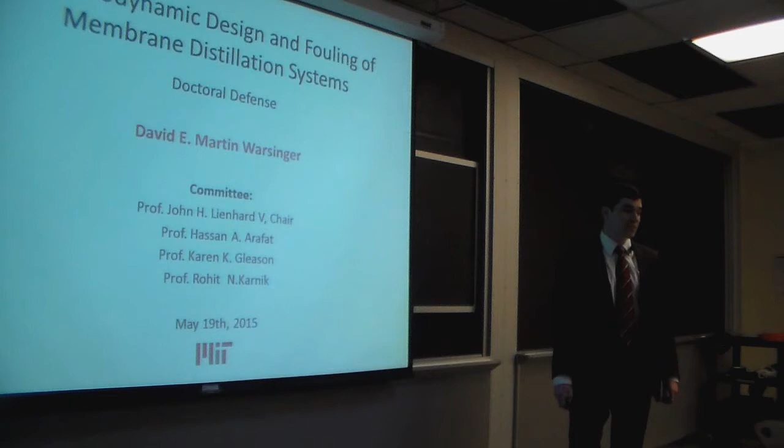I'm going to start with the global water crisis. We see on this map all the regions where, in red, people are using up the entirety of the renewable water at that location, which is the sum of the rainwater they receive annually. Globally, about 50% of the world's population uses all the renewable water at their location. Now, unlike most socioeconomic trends, which are improving, water shortages are actually getting worse.

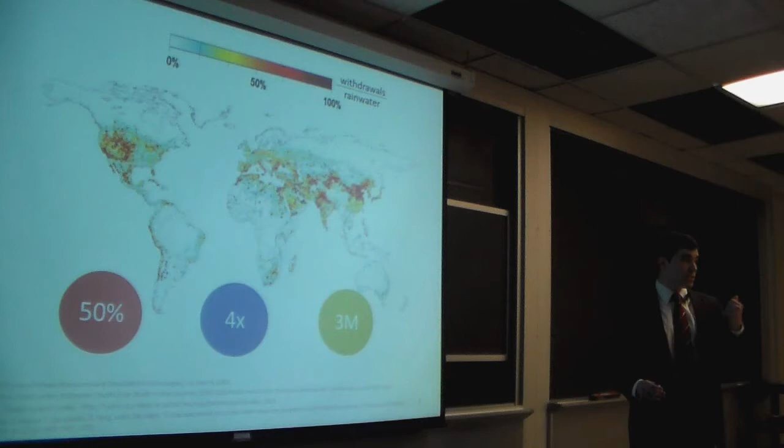Between the year 2000 and 2025, the amount of people experiencing water shortages is expected to increase four-fold. Lack of access to clean water also causes significant deaths from waterborne disease and pollution. Roughly 3 million people die per year from lack of access. This is only exceeded by heart disease, smoking, and hunger.

Membrane distillation is one of the technologies that can help address this global water problem. Membrane distillation has several distinct advantages. It can be very efficient. It scales down to small sizes very well while maintaining good efficiencies. Also, it provides very good rejection of salt, over an order of magnitude better than that of the most common technology, reverse osmosis. And finally, it's very fouling resistant.

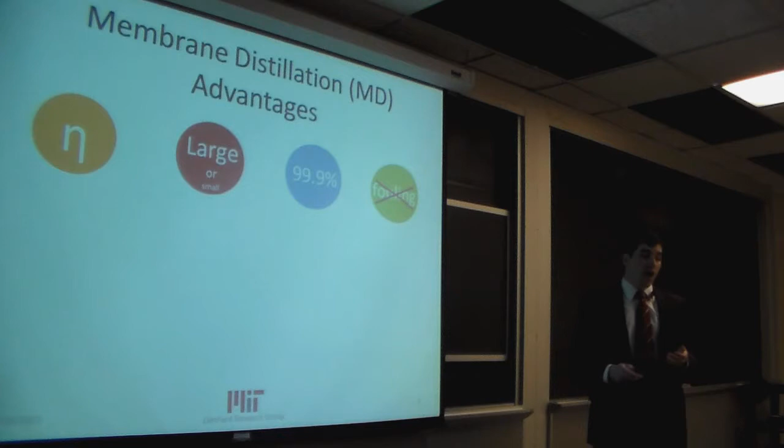The membranes are good at resisting fouling compared to other technologies like reverse osmosis, but prior to my work, this has been very poorly understood. Because of these advantages, many companies have taken interest in membrane distillation, mostly over the last 5 or 10 years.

So what is membrane distillation? Very simply, it's a desalination technology that uses a hydrophobic membrane that allows water vapor to pass through, but not liquid water. A temperature difference across the membrane creates a vapor pressure difference, which drives vapor to diffuse through the hydrophobic membrane. Now, to implement these systems in the real world, we need a hot source and a cold source for these systems.

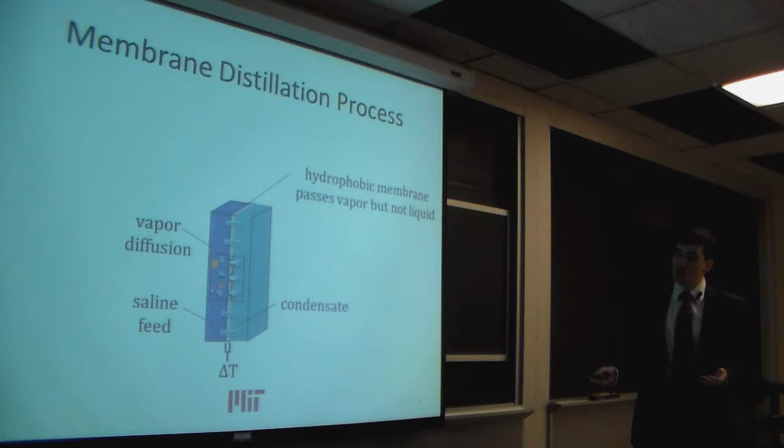So what's commonly done is a countercurrent heat exchanger-like setup, where feedwater enters, gets heated, and then goes back down through the system. This allows for recovering of the heat as it goes through the process, thus providing very good efficiencies in a very simple fashion.

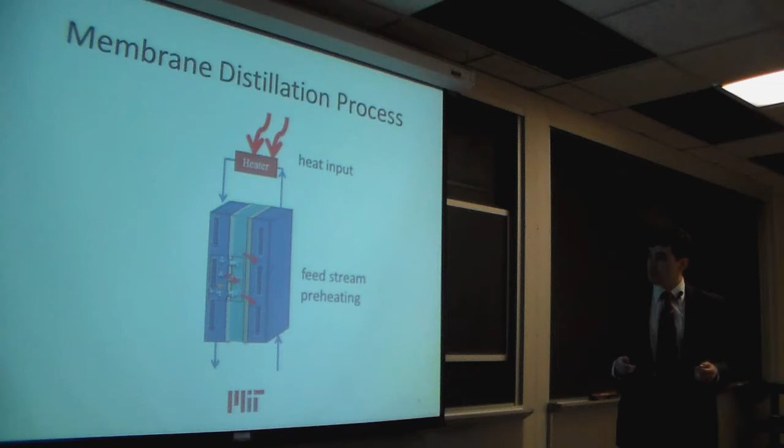Membrane distillation has a variety of different applications that have both been used and identified as potential uses. Membrane distillation has been used in one of the original applications in the food and beverage industry, concentrating fruit juice, for instance. It has also been used for seawater desalination.

It's been proposed and used to treat frack water, thus reducing the water consumption of these fracking sites and helping combat the issue of earthquakes we see as a result of fracking. It's also, because the water it provides is so pure, been used in the pharmaceutical and semiconductor industries to create very pure water. It can be used in the textile industry to treat those waters, and it can also be used with waste heat to provide fairly low energy demand desalination.

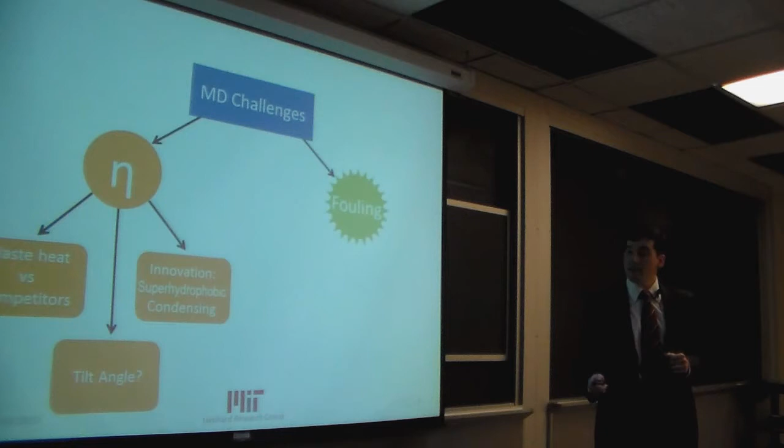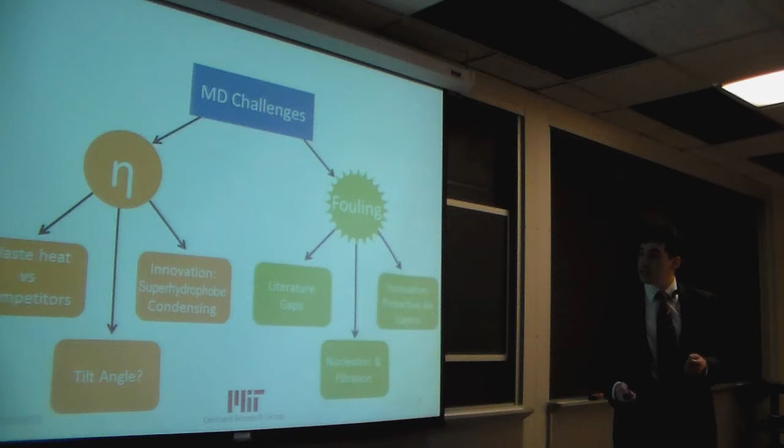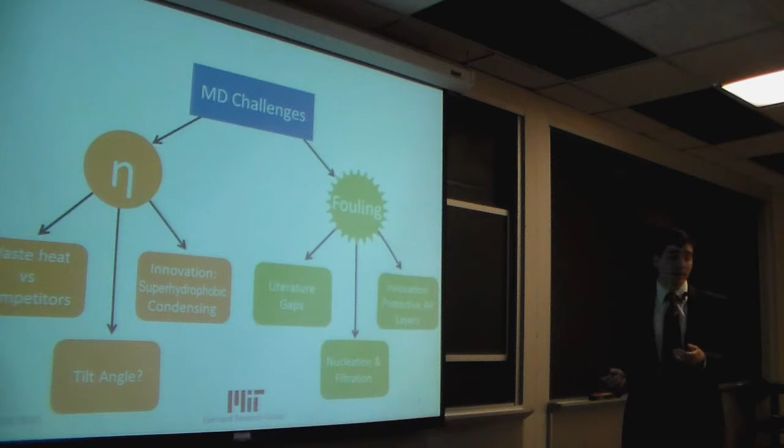I divided my work into two parts: studying the efficiency and fouling of membrane distillation, each having their own three parts. For the efficiency studies, I examined waste heat versus competitors, the effect of tilt angle in membrane distillation, and an innovation using superhydrophobic condensation to increase the performance of air gap membrane distillation. For my fouling studies, I looked at the gaps in the literature, did a study on nucleation and filtration to minimize fouling in the system, and provided an innovation of using protective air layers to reduce fouling in membrane distillation.

So first, starting with waste heat. A common question that has not been answered is how membrane distillation performs compared to other technologies on waste heat. Waste heat from data centers or other sources can vary in the temperature provided, and there's been no study in the past that really compares different systems to one another to see how they perform and how their components differ using different temperatures of waste heat.

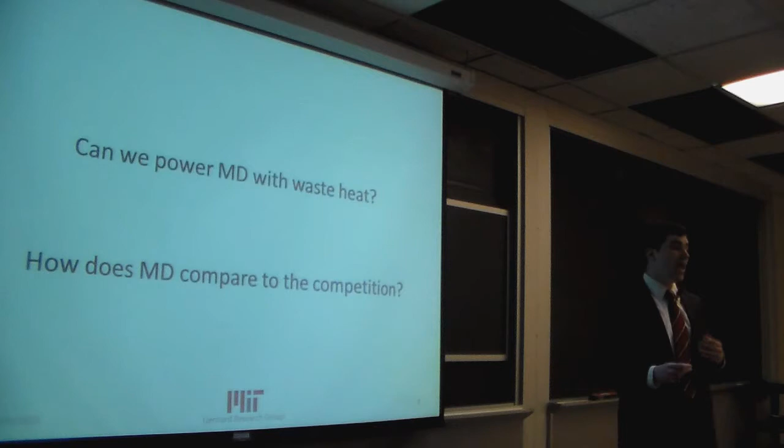For a waste heat thermal desalination system, we can imagine a black box which has a heat input at some given top temperature of the waste heat, takes in seawater, and rejects heat at a lower temperature, brine, and pure water. If we also want to compare this to electrically driven technologies, then we need a heat engine. The most feasible system for these sizes is a Rankine cycle, which can be paired to take the heat input and provide work to desalinate water.

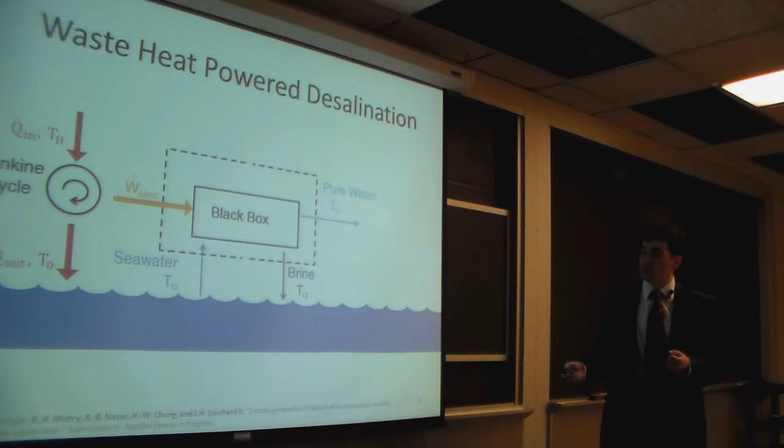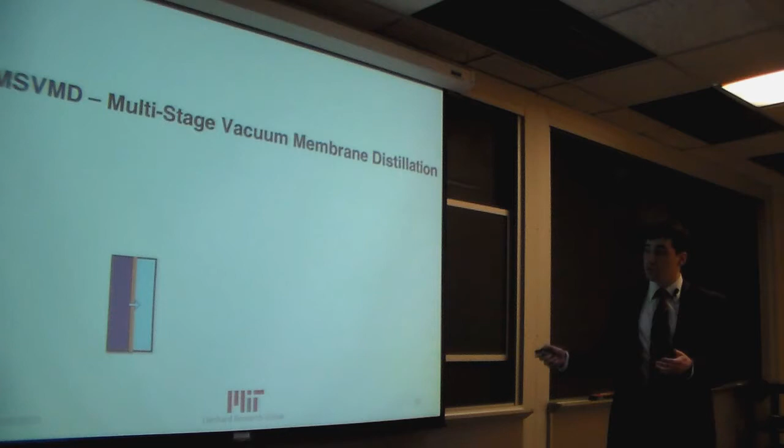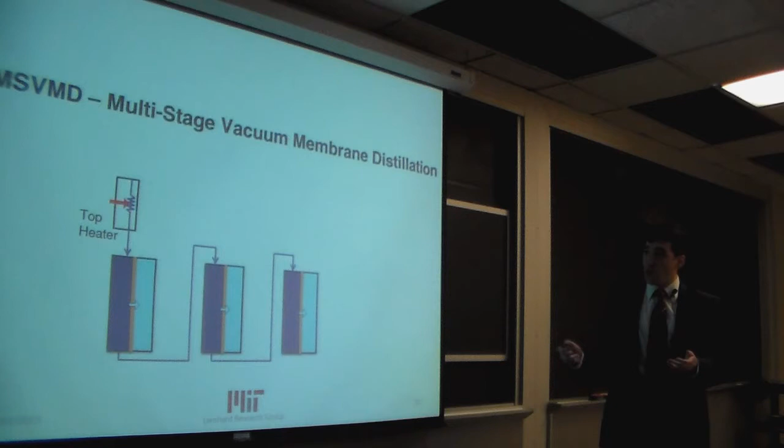The first system was a multi-stage vacuum membrane distillation system modeled. Here, like membrane distillation I described before, but you have multiple stages, each at their own matched pressure and temperature. For the system, you have a top temperature at the heat input and recovery throughout the different stages. Thermodynamically, the system behaves a lot like multi-stage flash, but I'm not going to go into the details—this is kind of the configuration.

While under normal conditions, operating at normal hot top temperatures, the entropy generation, which represents the thermodynamic losses in the system, is dominantly in the heat exchangers and the membrane distillation modules itself in those stages I showed you on the last slide. However, once we start using lower temperatures, this picture changes a whole lot.

The other heat exchangers, including the top heat exchanger and the brine regenerator, start becoming very significant in making up the losses from membrane distillation.

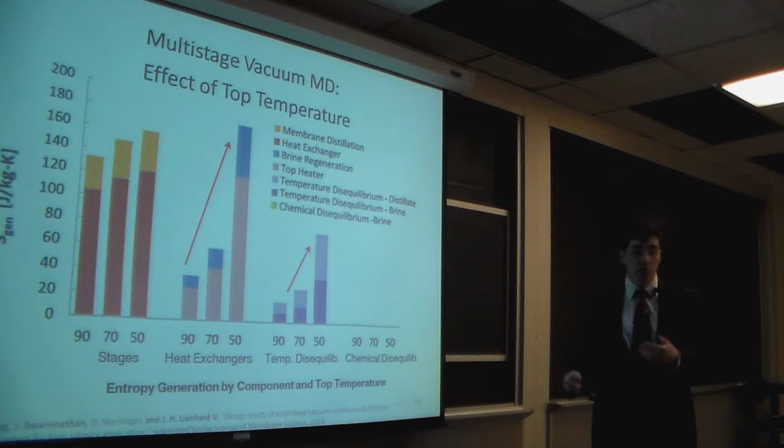This is largely due to the fact that the lower temperature gives you a reduced recovery, so the relative volume of the feed and brine streams is much larger compared to the condensate that you're producing. We find the same trend in the losses for temperature disequilibrium, which is losses because the water you reject to the environment is warmer than the surroundings.

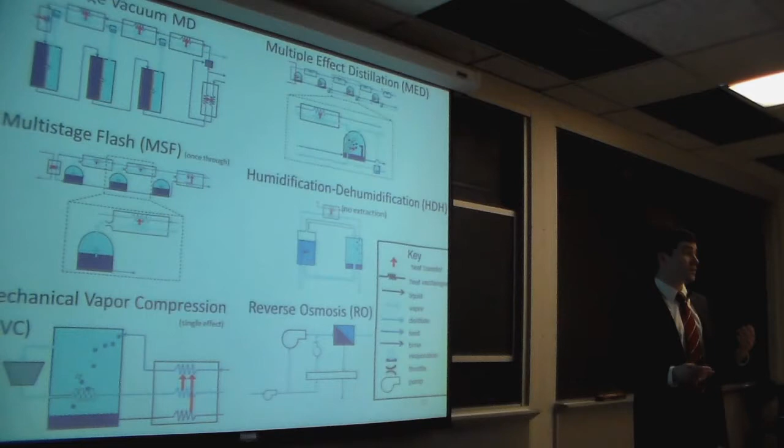We modeled six other different technologies, including membrane distillation: three very common representative thermal technologies and two leading electrically driven technologies.

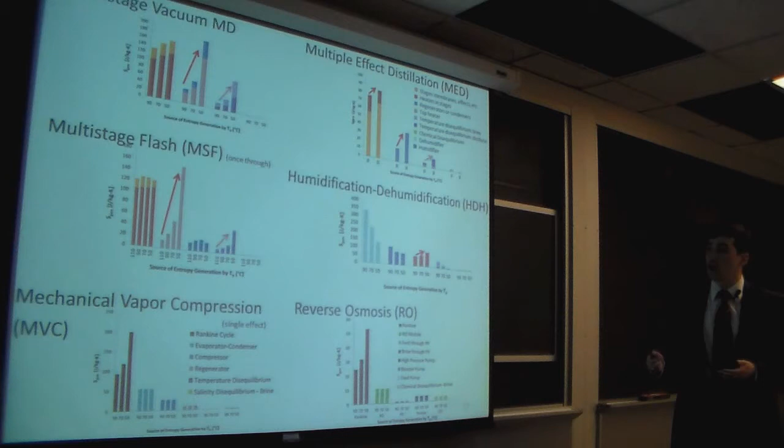In these results, we found a similar trend. All the various thermal technologies had significantly decreased performance in the thermal components that had the feed and brine streams, but not so much in the actual stages themselves, indicating how one should try to innovate to improve these systems to operate off lower temperature waste heat. We found the same trend for losses due to mixing when the water is warmer than the surroundings.

This paper was kind of like six in one—a little tricky.

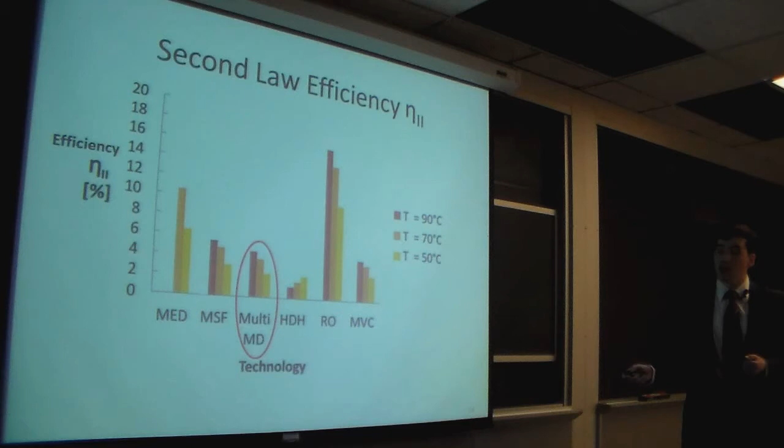Overall, we find that membrane distillation compares fairly favorably to the other thermal technologies, but is still outperformed by reverse osmosis. However, compared to traditional pairing with the power plant, the relative performance of the thermal technologies fares much better compared to that of the electrically driven technologies of reverse osmosis and mechanical vapor compression.

Next, I'm going to discuss the effect of tilt angle in air gap membrane distillation. There are several different configurations that are the most efficient possible configurations for single-stage membrane distillation. I focused on air gap membrane distillation, which is the most efficient given large surface areas and also given very saline feed solutions, as my collaborative work has shown. I also had collaborative work studying permeate gap membrane distillation.

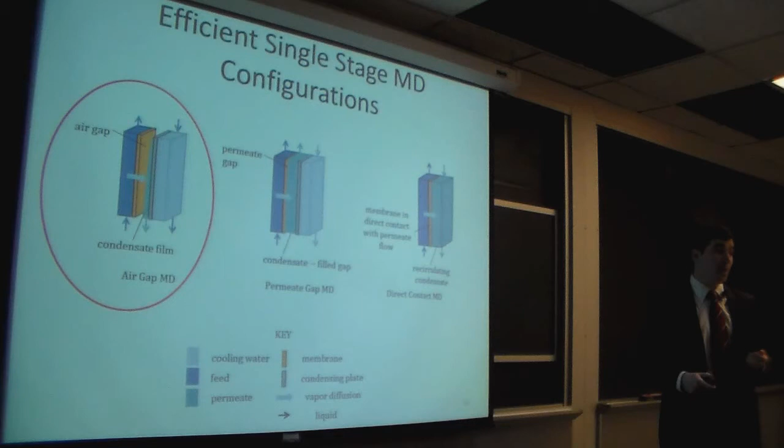For these systems, we needed a computational cell to model the behavior of membrane distillation in a numerical model. We used the finite difference method to integrate across several hundred computational cells, which each balanced heat and mass transfer.

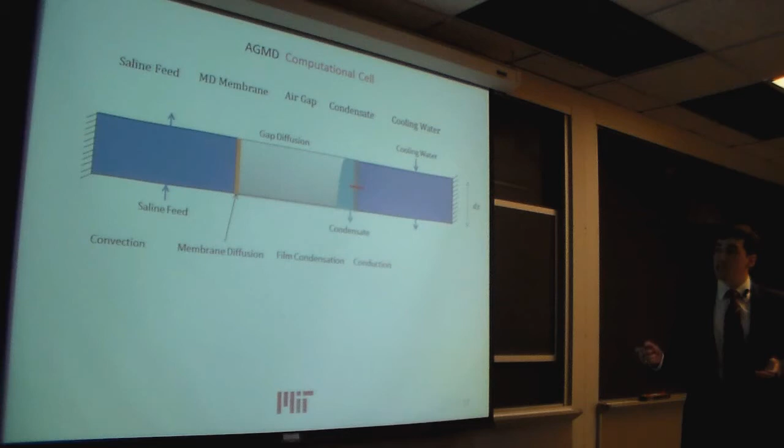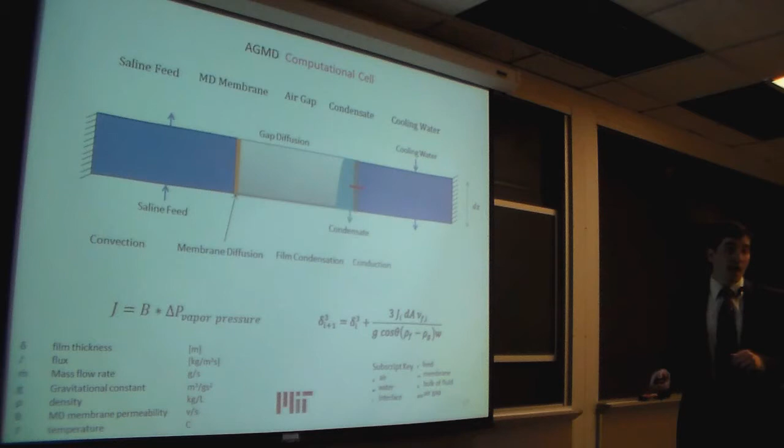There's two equations I want to point out that are key to the performance of membrane distillation. One is the general flux equation: the rate of vapor going across the membrane is a function of a constant times the vapor pressure difference across the membrane. Finally, the film thickness of the laminar film condensation is a function of g cosine theta and the film thickness cubed.

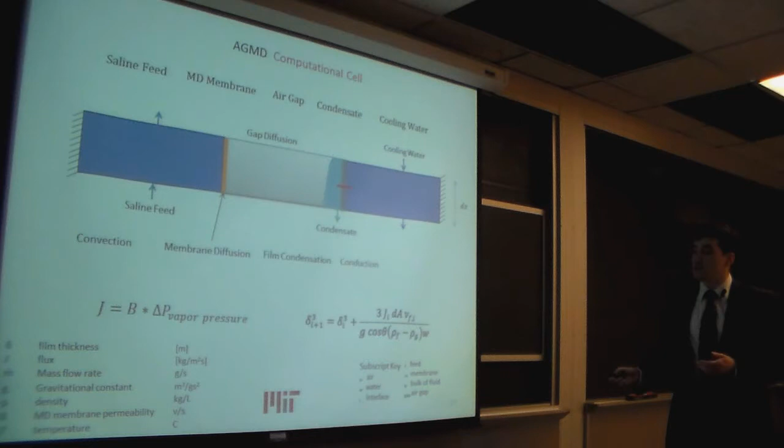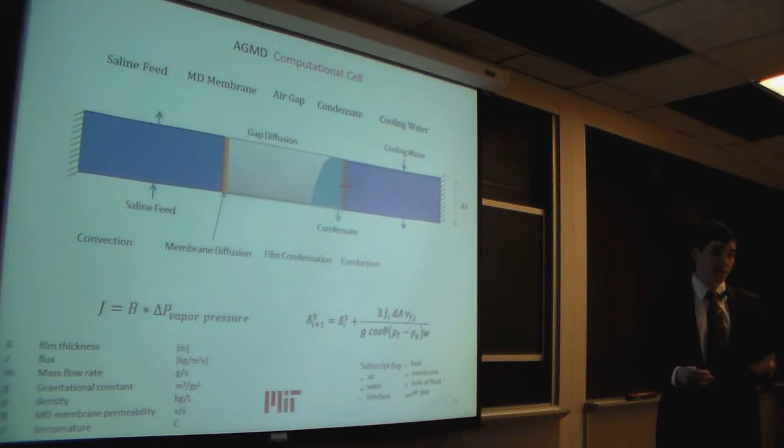If the film thickness increases, then we can have a reduced air gap, which can significantly affect the performance of the system. The air gap itself is the dominant source of heat transfer resistance and mass transfer resistance for the process. There are also other elements modeled, such as boundary layer effects.

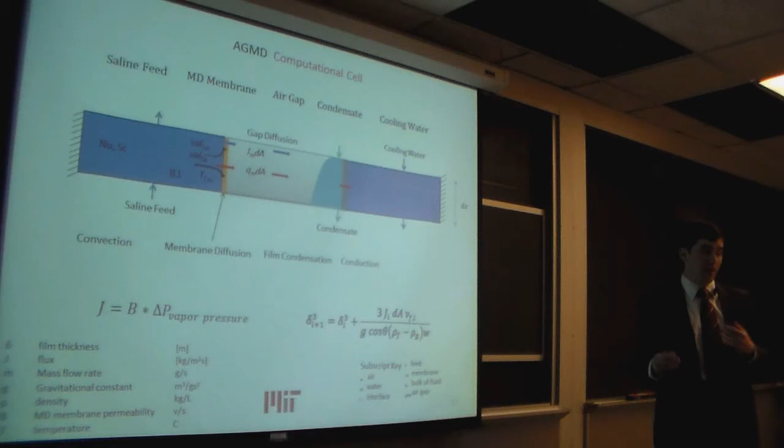There's several reasons why we want to better understand the performance of air gap membrane distillation at varying tilt angle. For one, it's one of the most common configurations, and despite this, in the literature, systems have had a mix of vertical and horizontal setups with really no method to figure out which one they should actually be using.

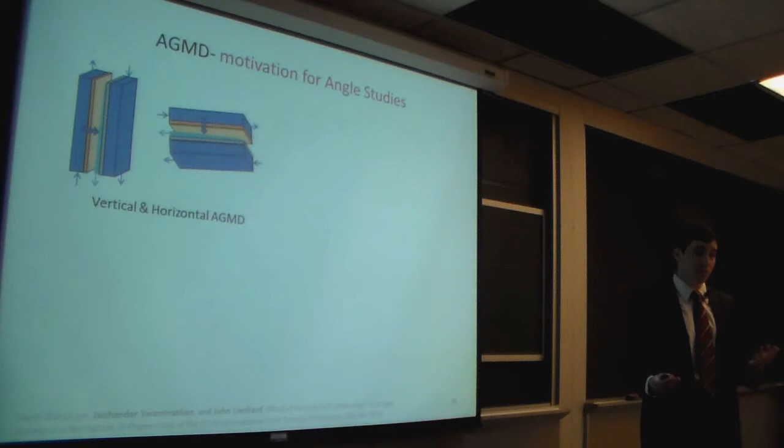Second, membrane distillation has been suggested to be paired with solar thermal power, and in fact, a previous PhD thesis from our lab by Edward Summers used solar thermal power to power air gap membrane distillation. If you want to maximize solar insolation, you may want to optimize a tilt angle for your given latitude, so you very well might want a tilted system.

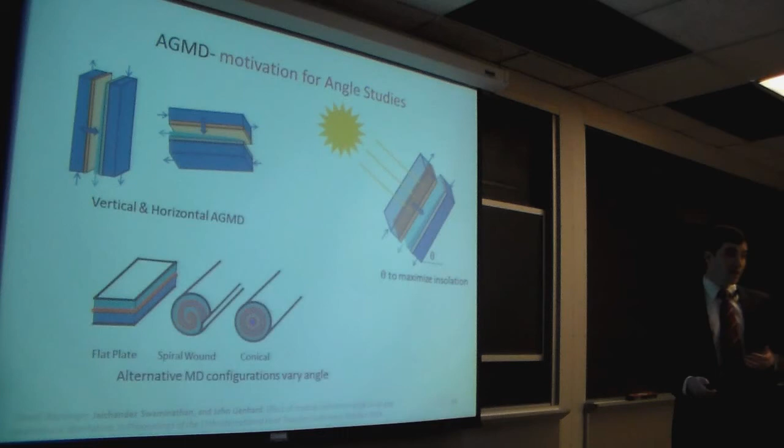Finally, systems of different configurations besides flat plate, which is the most common, such as a spiral wound module or a conical module, can have different angles in the way they're set up. So it's important to understand how this angle affects overall system performance.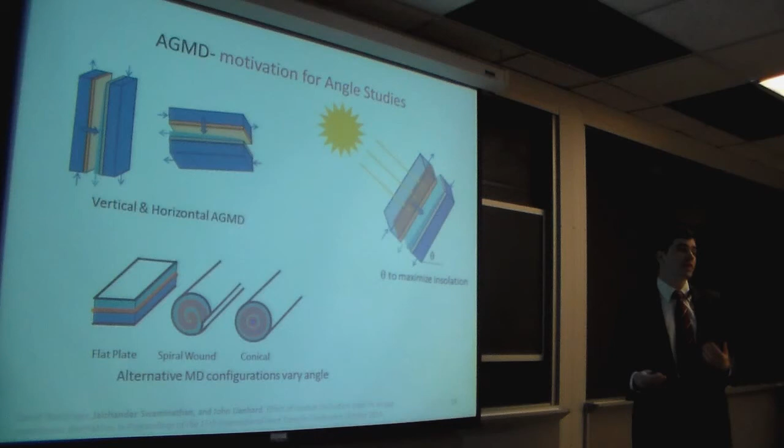This is what this actually looks like in practice. To tilt the module, we have an axis here where this module tilts back and forth in either direction.

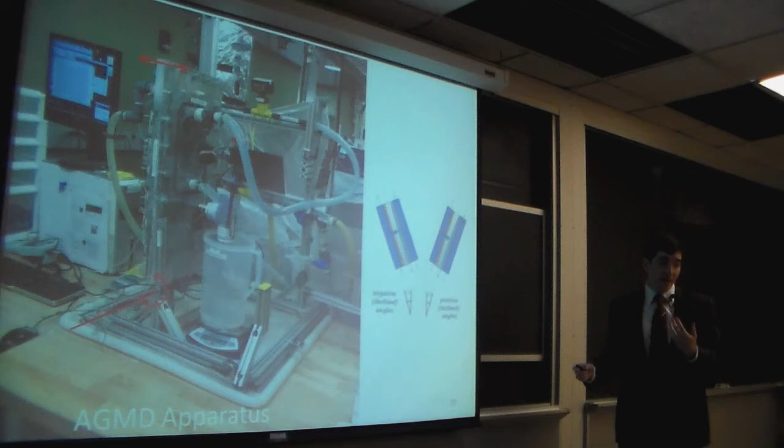To define this work, I'm going to indicate negative or declined angles tilting this way as angles where the condensate plate is above the membrane itself. And I'm going to describe positive or inclined angles when the membrane is above the condenser plate, which is more common than this configuration.

Overall, we found that in the modeling results, we expected a very small difference in the overall performance of membrane distillation based off of tilt angle. This is due to the relationship between cosine theta to the 1/4 and the film thickness, so not until you get to extreme angles does the film thickness appreciably change.

However, at declined angles, we start seeing the permeate flow rate increase. What's happening is we have this thermal bridging where water falls from the condensate plate onto the membrane and drains out the system that way. That reduces the resistance and starts making the system behave a little bit like a flooded system, which is what we saw at really extreme angles, where the gap entirely flooded because there wasn't sufficient angle to drain the system.

This behaves much like the permeate gap system I mentioned at the beginning of this presentation. So overall, we found that we can really tilt these systems quite a bit without any effect on performance, which is very promising for applications to solar thermal membrane distillation. We also found two different scenarios that can happen when we tilt it at extreme angles.

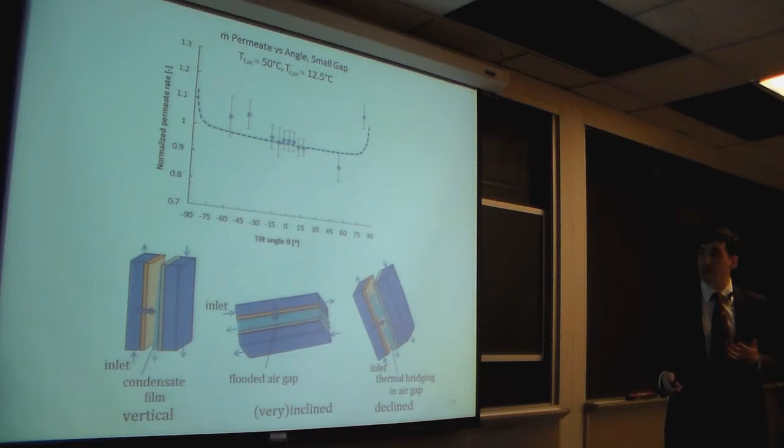My next work studying membrane distillation efficiency was an innovation. This was to use superhydrophobic condensation to improve the performance of air gap membrane distillation.

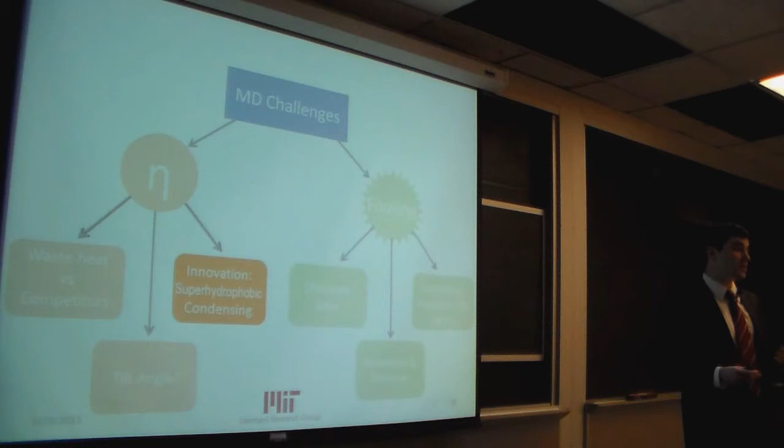In traditional film-wise condensation, we have this air gap, which provides the dominant heat and mass transfer resistance to the system. The heat transfer resistance is favorable, since we don't want any heat transfer between the hot and cold side that isn't used to produce more condensate. However, by providing a mass transfer resistance by slowing diffusion, it slows the overall permeate rate, requiring more surface area to achieve the same performance.

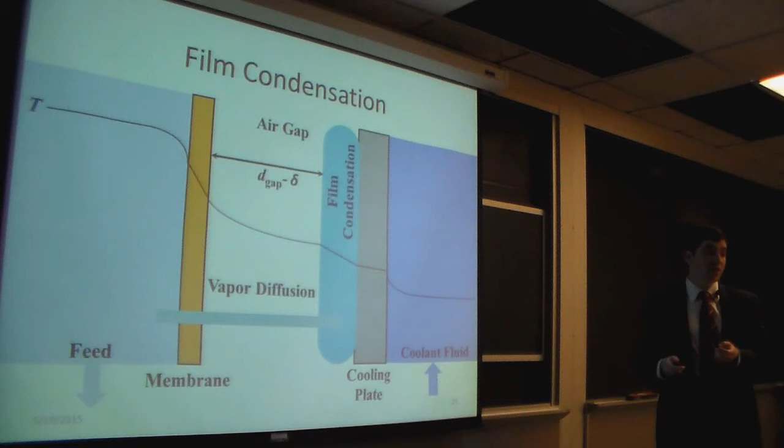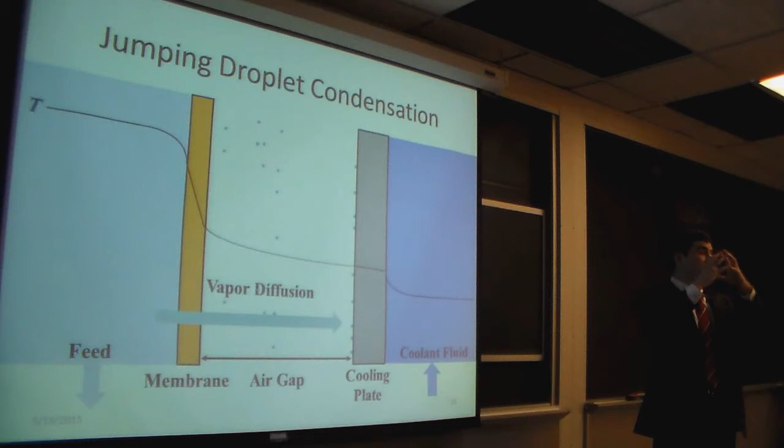Now, we can use these superhydrophobic surfaces which have dropwise or jumping droplet condensation instead of a laminar film. In these systems, we have droplets that combine, and these are very small droplets, around 100 microns. When they combine, the surface area decreases. The energy is dissipated into kinetic energy, so they wobble, and the surfaces are so hydrophobic that they eject off the surface.

As we see here, this reduces the overall diffusion resistance by having better mixing in the gap and additional condensation on the droplets themselves as they fall out of the system. It also avoids the temperature gradients that are unfavorable, such as that along the laminar film itself.

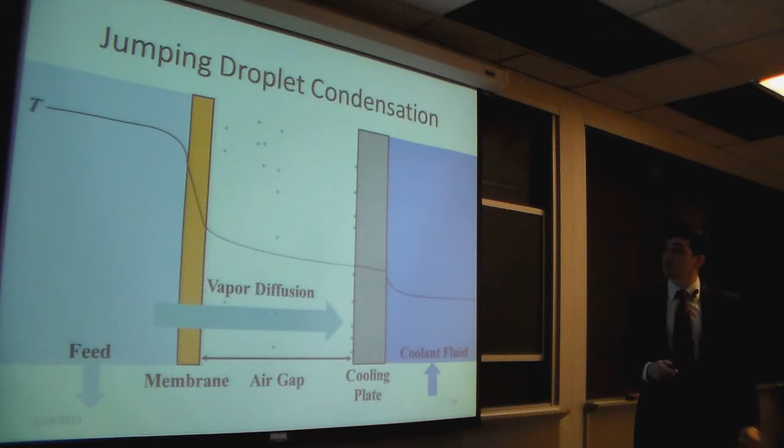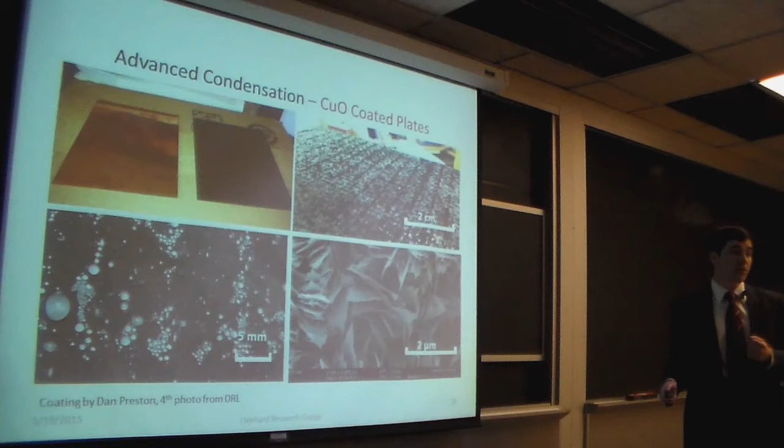Overall, we found that in the superhydrophobic case, the overall permeate flux actually increased pretty substantially. We've modeled this against a water gap case which entirely lacks the mass transfer resistance of the air gap, and found that by introducing superhydrophobic condensation, we almost entirely remove the mass transfer resistance.

Now, at higher driving temperatures, the performance of the control laminar film condensation and the superhydrophobic surface converged. This is due to the fact that with our small air gap size and geometry, the system became flooded in both cases and so performed similarly.

However, in real systems, we have a much smaller temperature difference between the two sides, indicating that we'd be more in this range where performance is enhanced by as much as 116%. Given that air gap membrane distillation can thermodynamically be the most efficient of the membrane distillation configurations, this is a substantial way to improve the overall performance of membrane distillation.

This work is under review by the Journal of Membrane Science, and a patent was submitted this last fall with collaborators in this room.

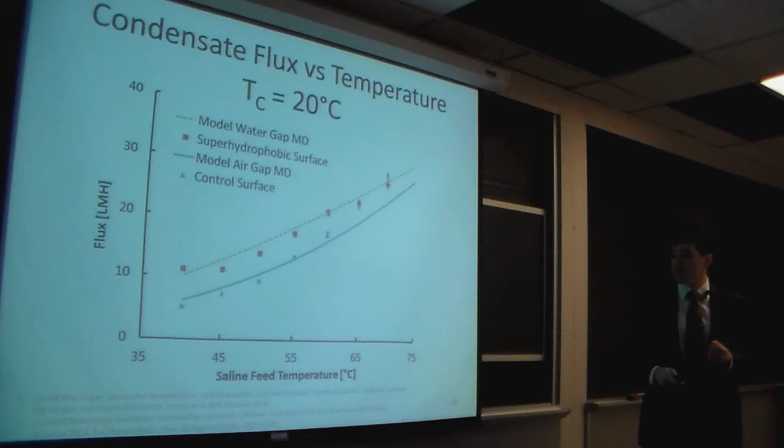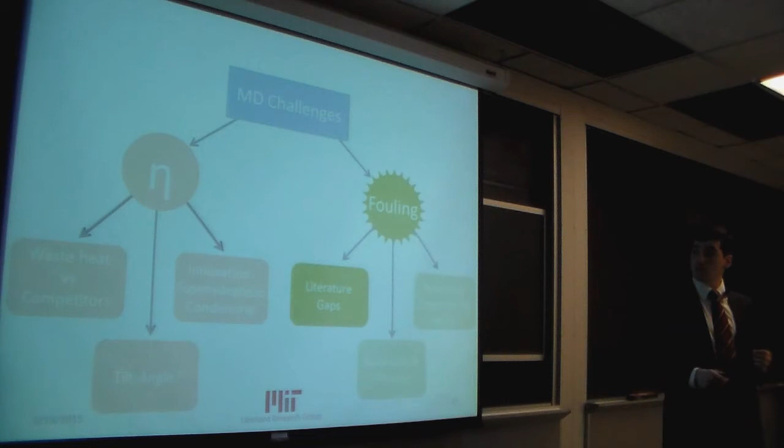So next, I'm going to discuss fouling in membrane distillation, first starting with gaps in the literature.

There are 4 types of fouling that can occur in membrane distillation. There is inorganic fouling, which is fouling of salts on the membrane surface. There's also particulate fouling, where small particles deposit on the membrane surface.

Biofouling can be a variety of different things. It can be bacteria growing on the membrane surface. It can be fungi. It can be a biofilm produced by either. It can be other organic compounds. It can even be small microorganisms, such as seen in some seawater systems.

Finally, we have membrane degradation, or damage to the membrane itself, such as cracking, that can occur during intermittent operation or using abrasive chemicals. This work was published in a review paper with other collaborators at Masdar.

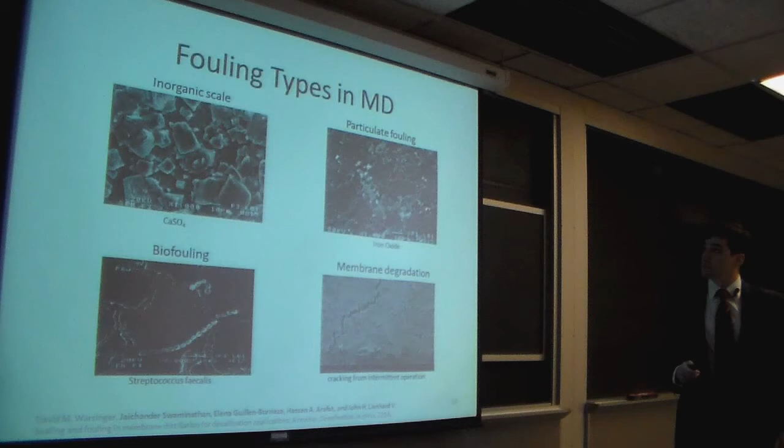Overall, we've had a variety of effective mitigation methods for fouling in membrane distillation. However, there were some that were noticeable, and some of the most effective were not well understood.

Using filtration to remove particles from the bulk was extremely effective in reducing the effects of fouling. However, it wasn't very well explained as to why that was.

Membrane superhydrophobicity was more of a mystery. In studies that were coated with superhydrophobic coatings, fouling almost completely disappeared. In some cases, it actually baffled the authors. In one instance, they thought they must have made a mistake in their experiment because it was so hard to make fouling occur once they had a superhydrophobic coating.

Some of the other methods, such as high temperatures to kill bacteria and using basic and acid washing to adjust the saturation index, are fairly well understood.

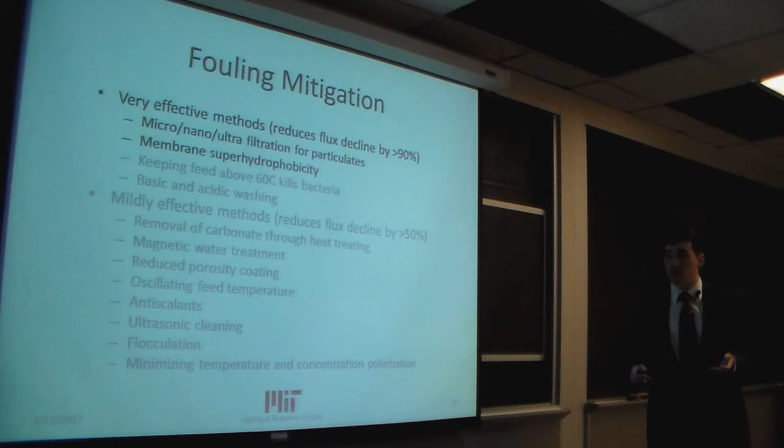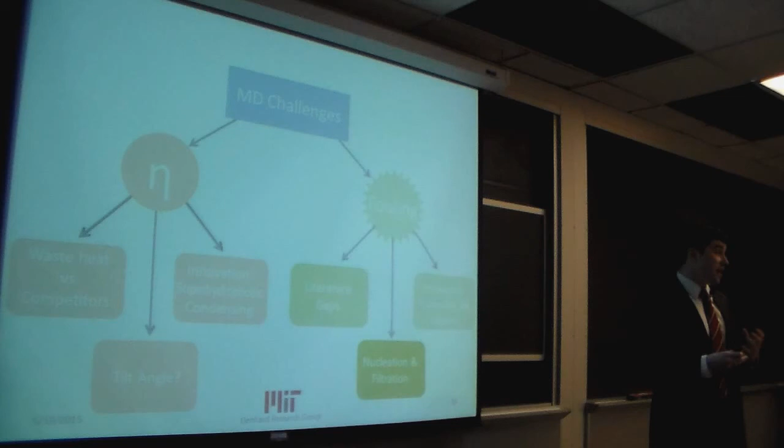This work in filtration made me wonder: is nucleation happening largely in the bulk of the solution, and thus is fouling occurring as a result of bulk effects, not the membrane surface itself, which is conventionally thought and more commonly considered for other membrane processes?

Does it dominate in the bulk rather than on the membrane surface itself? So let me give some background.

Nucleation is the process where particles in solution combine and grow to a significant size and eventually precipitate, or adhere to a surface outside the system. There are several types of nucleation.

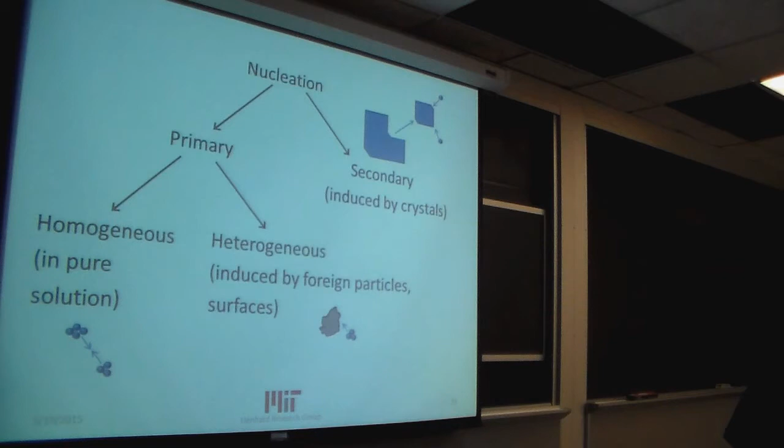Primary nucleation occurs in systems where primary nucleation occurs in the absence of crystals in the bulk.

There are two types of primary nucleation. There's homogeneous nucleation, which occurs in a pure solution. This is actually very hard to make occur in practice and would take very pure solutions.

In reality, to really make this happen, you need to do an experiment with levitation, such as on the space station. In most real systems, you have heterogeneous nucleation, which is induced by foreign particles and surfaces, such as atmospheric dust or other contaminants in the system.

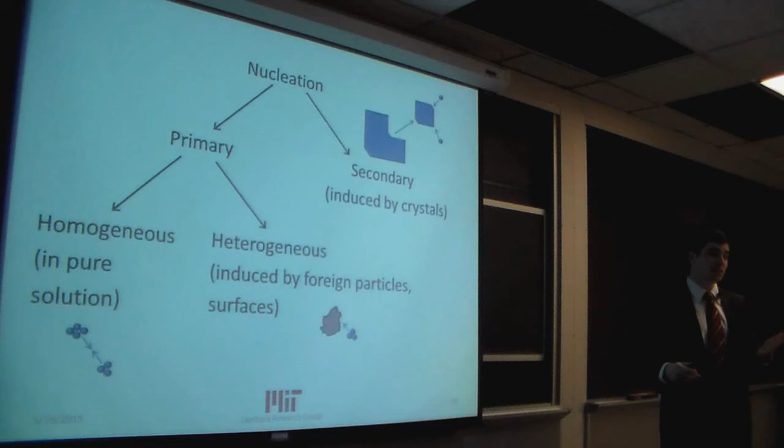This is the most common form in most membrane distillation systems. There's also secondary nucleation, where crystals that have already formed break off into different pieces, and then these pieces start to grow rapidly. In a membrane distillation system, you do not want this at all.

This can occur even at very low saturation indices. Meanwhile, for heterogeneous and homogeneous nucleation, you can go to fairly high saturation indices, which is a measure of how far you are above the saturation level for that salt, before you see significant fouling occur.

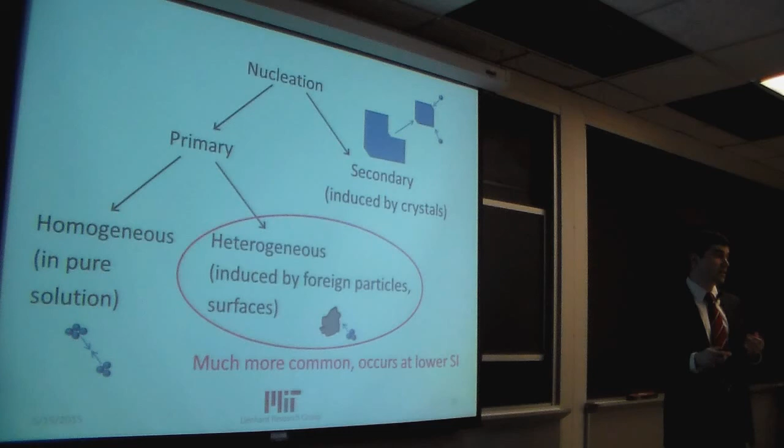So let's take a look at the thermodynamics for this process, for nucleation. There's an energy barrier for nucleation that is maximum at a critical radius size.

What's essentially going on is you have these competing terms. At very small sizes, you have very high surface area relative to the volume. The surface tension, which is an area effect term, is acting against you forming these nuclei. But a volumetric term, which is a function of essentially chemical potential, wants these salts to precipitate.

So through essentially statistical random action, eventually enough of the particles combine to form a critical stable nucleus. Once it reaches the size, instead of redissolving into the bulk, it starts to rapidly grow as a crystal.

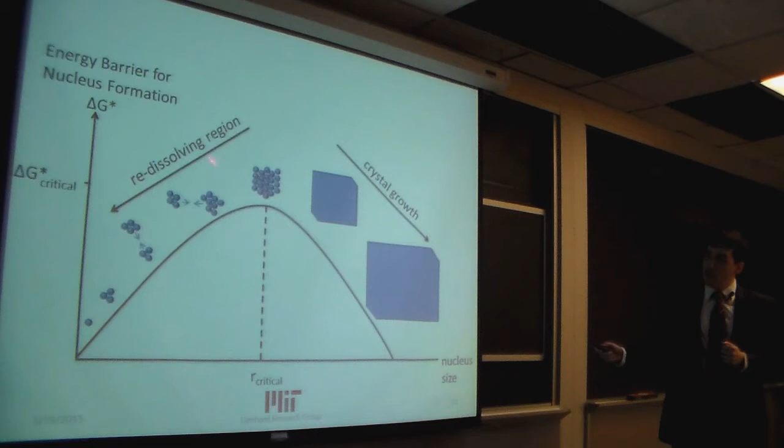If you can stay on this side of the equation for long enough, you can mostly avoid fouling and run at supersaturated conditions.

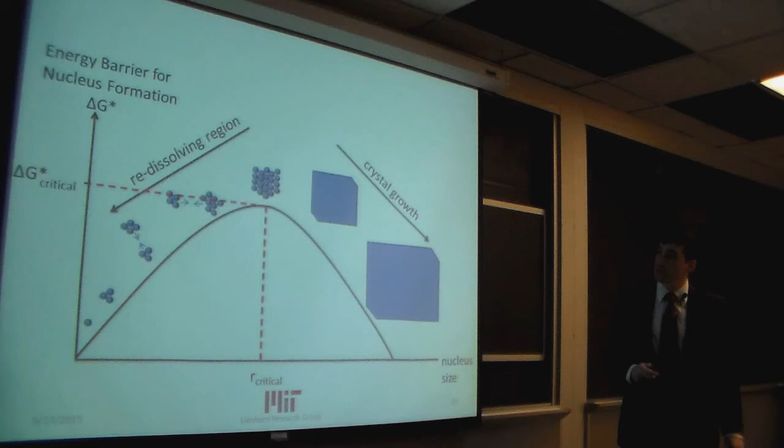There's been a fundamental theory called classical nucleation theory, linking the Gibbs free energy barrier to a function of the different surface tensions between the salt, the solution, and the substrate you're working with.

Critically, the induction time is an exponential function of this Gibbs free energy barrier. So small changes in the Gibbs free energy barrier will cause dramatic increases in the amount of fouling that occurs.

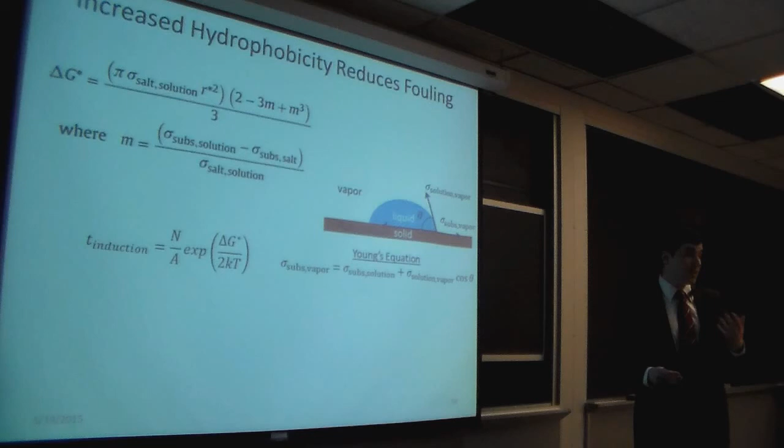I had the idea of linking this theory with Young's equation, using the contact angle that's traditionally used to measure superhydrophobicity, which includes the vapor, liquid, and solid, and not the crystal.

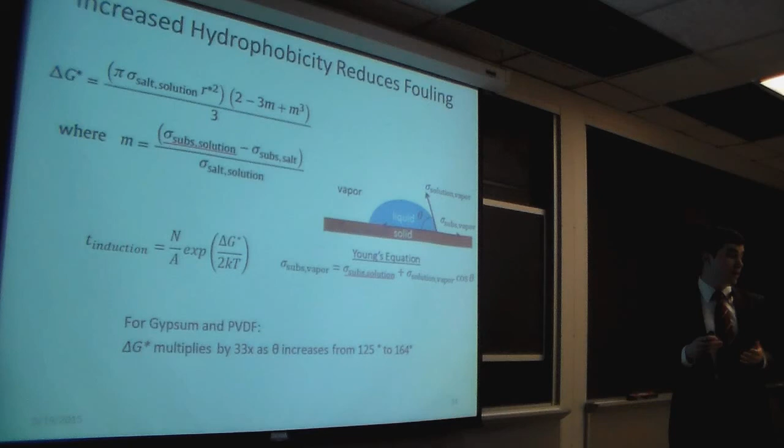So in short, we have an explanation for what we found in the literature, that superhydrophobic contact angles can reduce fouling, tying into nucleation and the induction time.

Long story short, superhydrophobic membranes we can expect from theory as well as previous practice to reduce overall fouling.

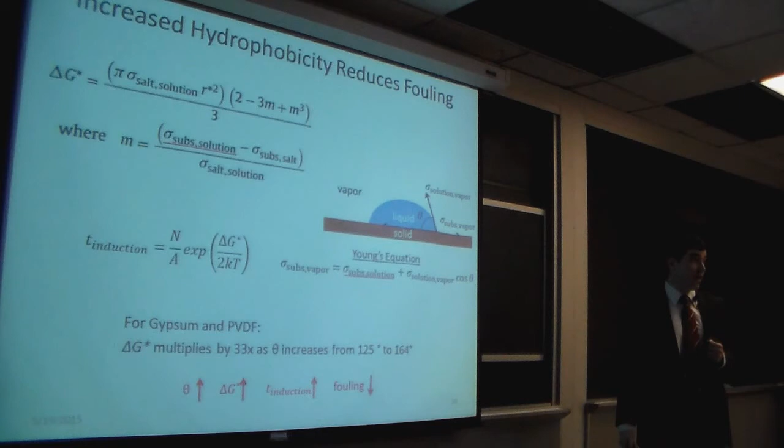To test the ideas of the dominance of bulk nucleation, we took the membrane test bed, which I mentioned previously, and simply added a filter into the system.

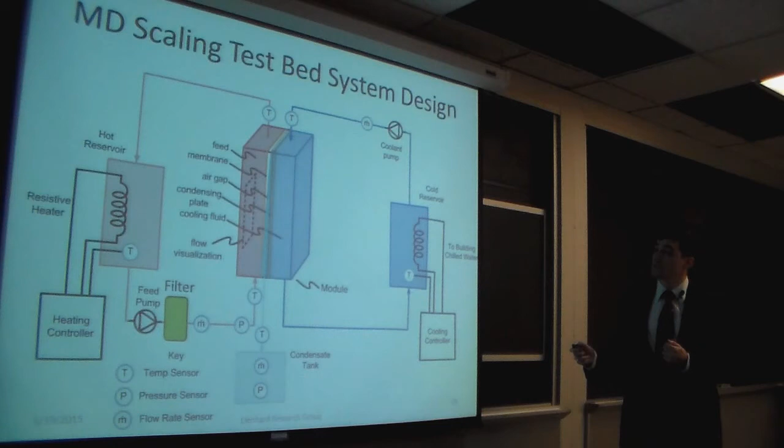To really test if bulk nucleation was dominant in membrane distillation, we're going to make conditions very unfavorable to bulk nucleation and see if bulk nucleation still dominated fouling by removing a good portion of the bulk nucleation with this filter.

So we used an uncoated PVDF membrane, so it wasn't too hydrophobic. We used a higher concentration near the membrane itself by dramatically reducing the flow rate of the system, and thus encouraging more nucleation on the membrane surface.

We used a really pure system through using DI water and thorough cleaning protocol to minimize any nuclei for heterogeneous nucleation in the bulk. We minimized any metal parts or other parts that could encourage nucleation on other surfaces. And we used calcium sulfate, a salt that's not too strongly affected by temperature, and also really minimized temperature gradients in the system for some other design innovations.

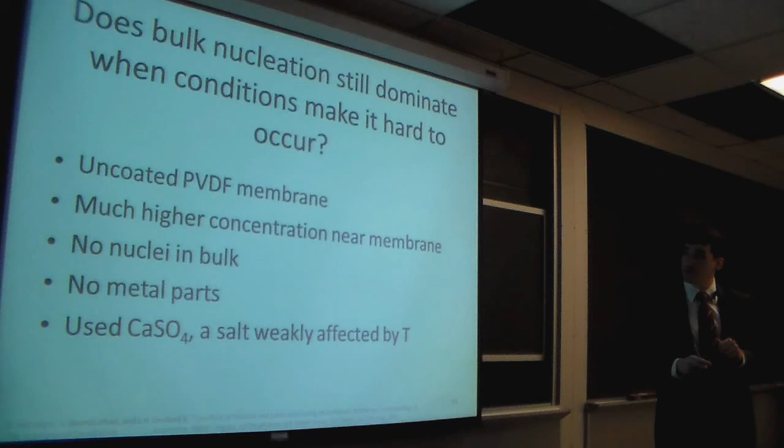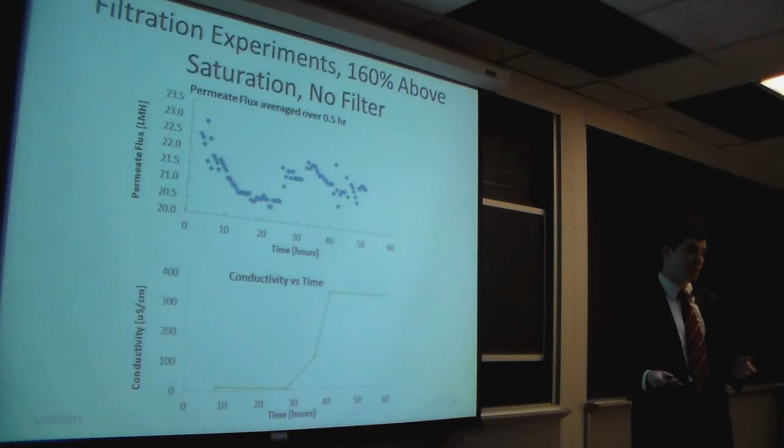We found that in the saturated case, with very high saturation and without any filter, there was really bad fouling. The flux of the permeate dropped precipitously, and the condensate was actually contaminated—the conductivity or salinity of the condensate increased dramatically. In fact, it increased so much that the overall flux increased as well, indicating very bad fouling and a total loss of a really productive membrane distillation process.

My prediction with particulate fouling is that small particles that are already growing deposit on the membrane surface and then grow. And if you can remove that process, you can dramatically decrease fouling in membrane distillation.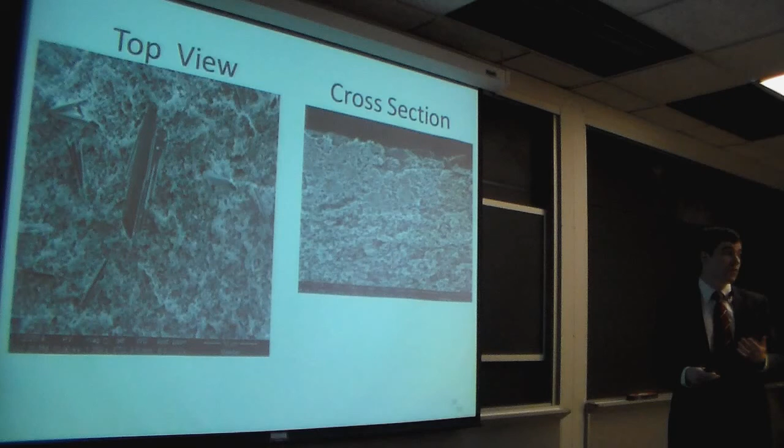Our overall results showed that the introduction of a filter to remove a significant fraction of the bulk nucleation dramatically decreased fouling in membrane distillation. In fact, even in the case where we had extreme fouling and total destruction of the process, when the filter was applied, we had some flux decline from blocking of the membrane pores, but we had no leaking even after running the experiment for several days.

So overall, we find that even in conditions very adverse, bulk nucleation is dominating fouling in membrane distillation. This work is going to appear in the IDA conference, and will be continued in another journal paper as well.

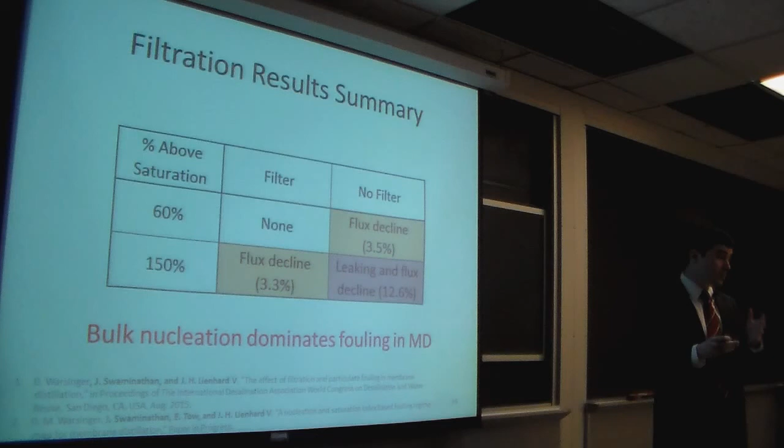This helps solve a lot of the mystery as to how to prevent fouling in membrane distillation, and why it has proven to be more fouling resistant than other technologies. It also ties in with the whole contact angle concept, meaning that in the bulk, some of these particles are more favorable for nucleation, whereas the surface is not.

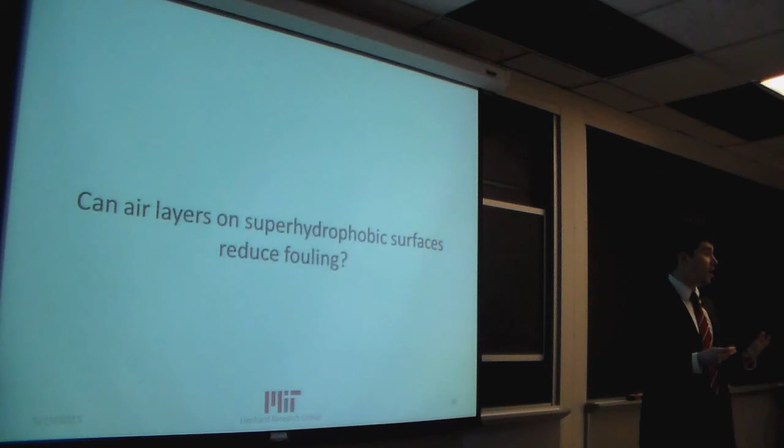Finally, I'm going to discuss innovation using protective air layers to reduce fouling in membrane distillation. Essentially, can you have an air layer on the membrane surface acting to block these particles from depositing on the membrane itself, and thus reduce overall fouling in membrane distillation?

To do this, we had our PVDF membranes coated with PFDA by Amelia, who's here right now. And we did other tests to verify we didn't significantly impair the process, such as checking that the permeability did not change significantly.

In the superhydrophobic case, you can actually see this visible air layer, where we have this weird sheen of air on the membrane surface. However, on the regular hydrophobic case, it just looked like any surface, like a piece of paper put under water.

And this work is in a conference paper, a journal paper, and a patent.

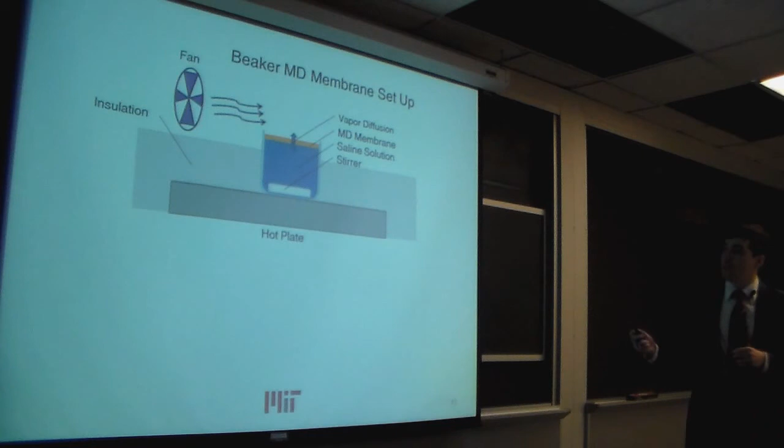To do these studies, we used a beaker setup to have an MD membrane on top of a solution with a foulant. We used mixing of the water and the air to provide good heat transfer through the system. And we tried several different ways of introducing air layers into the system, including lifting the membrane up entirely and also adding saturated bubbles of air into the system.

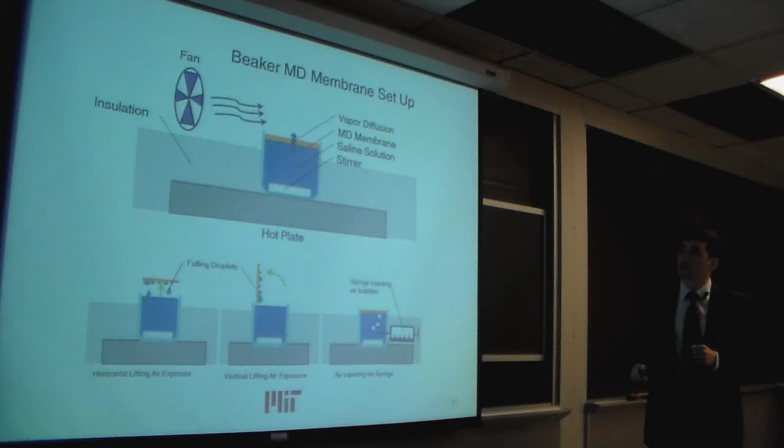Overall, we found that for alginate, which is a biological foulant, there was a really significantly reduced amount of fouling, on the order of 95 to 97% reduction of mass adhered to the membrane itself. Alginate is commonly produced by algae and is known to be an important foulant in that it occurs in the gel layer in seawater applications.

For salts, we had positive effects from both having the air layers and the superhydrophobicity, but they were somewhat mixed as compared to the very obvious case of a huge improvement for biological fouling.

What's very promising about this is that while membrane distillation is known in the literature to be very resistant to scaling of salts, it is proven less resistant, or worse, when dealing with biological fouling. So we could potentially use the introduction of air layers to reduce biological fouling problems and give membrane distillation the best of both worlds.

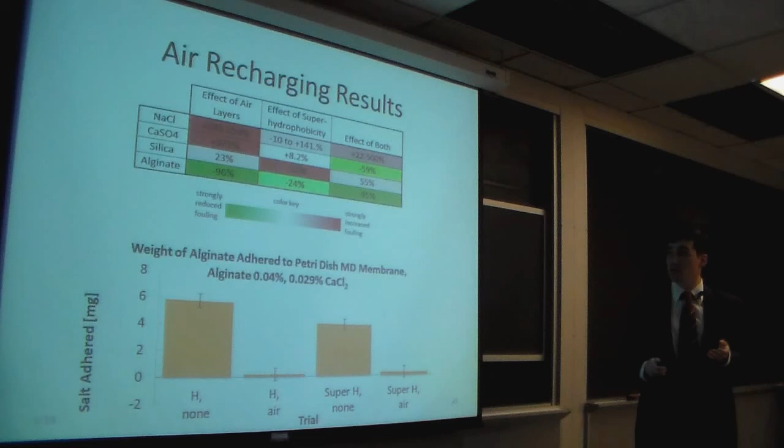The effects for the salts were mixed, but this can be largely assigned to nucleation in the bulk. These bubbles, as they go through the system or are otherwise introduced, can actually cause nucleation, and many studies in the literature have seen nucleation of salt crystals around air bubbles. So controlling the air-water interface and any heterogeneous fouling in that layer can reduce this process, making it more effective against fouling of salts.

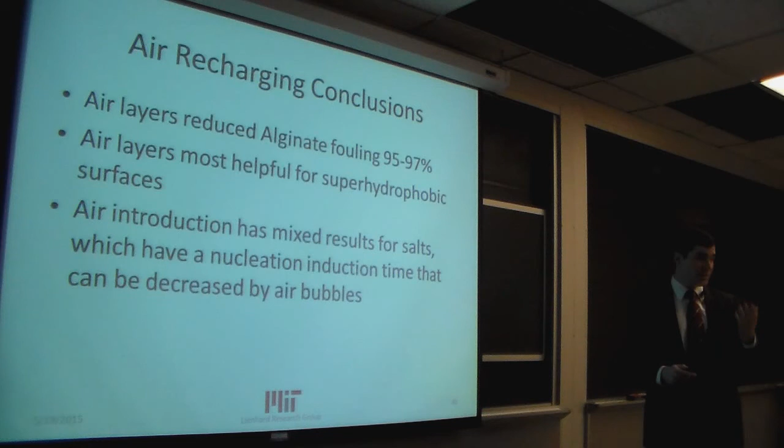To share this work with you today, we had to submit the patent last night, which was a bit of a fun little challenge. Due to a lack of prior work in the literature, we actually applied this approach to other surfaces, not just membrane distillation, using air layers and maintaining them on a variety of surfaces to reduce fouling.

So this comprises the overall work for my PhD thesis.

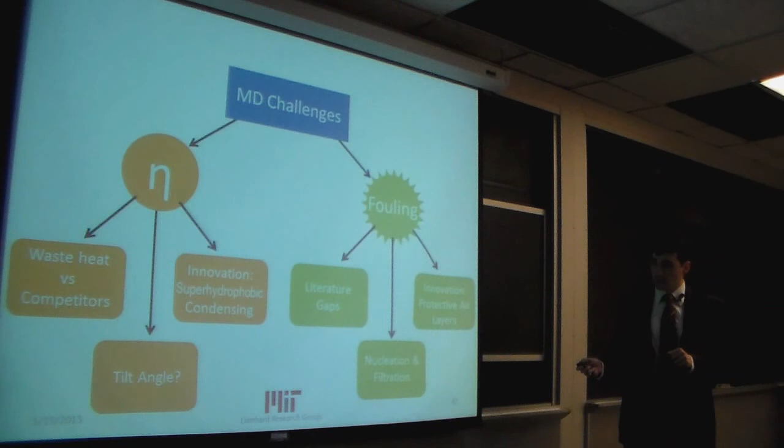There was a study on waste heat comparing the performance of different components in membrane distillation, and comparing the technologies to one another using shared assumptions to see how they fared on different waste heat temperature sources. A study on the tilt angle of air gap membrane distillation found that while vertical angles were ideal, tilting did not have a significant effect, suggesting that for solar thermal systems, tilting could be done freely without worrying about performance, and that many horizontal setup results in the literature are still applicable even though film thickness might vary a little.

A review paper on fouling identified several key issues and gaps in the literature that further work helped fill. A study on the effect of nucleation and filtration in fouling showed that in membrane distillation, fouling mostly occurs in heterogeneous form in the bulk, and if you limit heterogeneous bulk nucleation, you can significantly reduce fouling in membrane distillation. This also helps explain past papers showing why membrane distillation is resistant to fouling, and ties into the thermodynamics of nucleation on these surfaces.

And finally, I had a contribution on using the introduction of air layers to reduce fouling in membrane distillation.

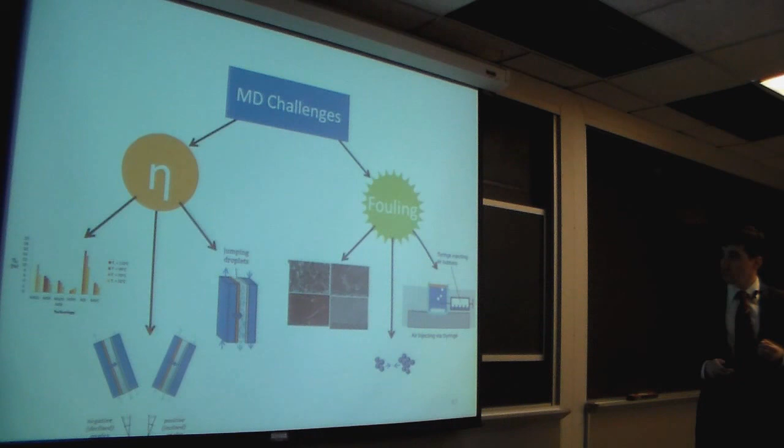In addition to that work, I had a variety of non-first-author papers also contributing to membrane distillation, thermodynamic design, and fouling. This included work on the effect of surface tension and how it changes in high salinity membrane distillation, multi-stage vacuum membrane distillation including a paper by Hyung Won that used the work I showed you at the beginning, and using a conductive gap for an improved permeate gap membrane distillation, which is also the basis for about 3 patents which Jay has led.

Comparing different module configurations and their performance in membrane distillation, work on multi-effect membrane distillation using seawater and the temperature difference between deep ocean depths and the surface to drive membrane distillation or other desalination technologies, studying different foulants and how they affect wetting in membrane distillation, in situ visualization of fouling in membrane distillation, and finally the creation of membrane distillation membranes and testing their performance with Amelia.

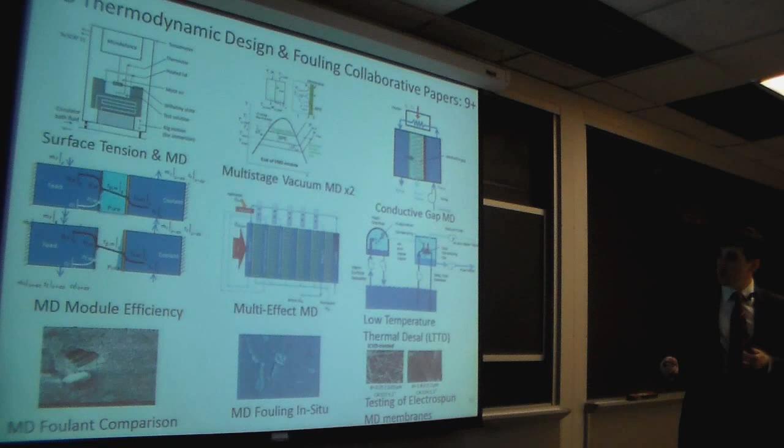So with that, I wanted to briefly show the publications: first author, collaborative author, as well as patents I've worked on for my work and other work, and academic presentations.

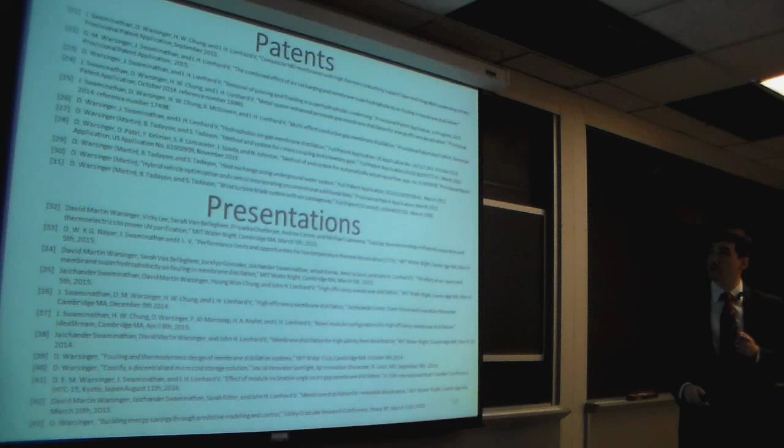I also wanted to thank my wonderful fiancée, Andrea, with the most embarrassing picture I could find.